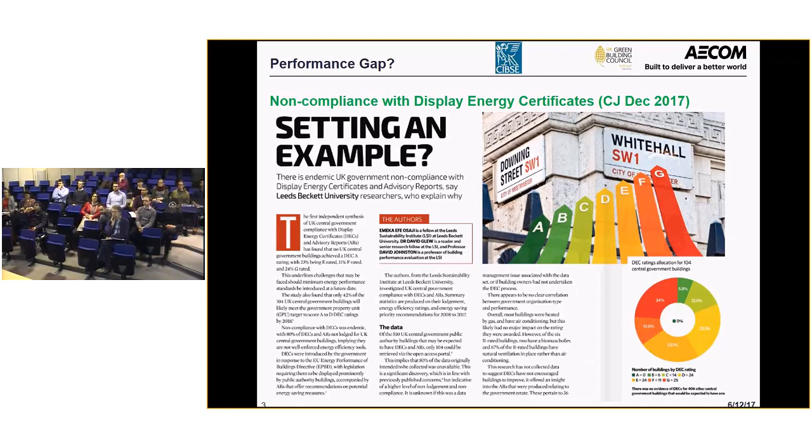And I wanted to throw in a few other ideas of things that you'll probably think are a bit controversial. But certainly performance seems to be the hot topic. If any of you've looked at this month's CIBSE Journal, all those bits are out of the CIBSE Journal to do with headline performance, or HVAC Systems Group has performance gap in its site, or stuff to do with performance awards. They've also got things talking about display energy certificates and how they're not being used, and looking at compliance within the journal. And also the CPD at the back is on something called co-heating tests. I've got a few results from co-heating tests of people saying, well, we've done a different type of test on a building, and it might get closer to performing, but it still doesn't give you exactly the same performance. So what is going wrong with what we're doing? A lot of the grounds for the performance gap were people comparing often a display energy certificate, a DEC, with an energy performance certificate.

One building said it would perform like X, but it didn't really mean it would perform like that. They'd measure it and say, boy, we've got something that uses twice as much as they said it would. Well, did they say it would, or is that just problems in software, problems with the users, or problems with our knowledge of physics? Where are the shortfalls, and how do those things add up to buildings using 3 or 4 times the energy they thought they would? And is there anything wrong in that?

You'll probably all have your own opinions, but I know from my own mistakes, just a simple budgeting I did as a dad of 3 kids who are now married with 3 grandkids. I budgeted for my wife giving up work to look after our first child, and thought I could cover the gas bill, electric bill, phone bill, all sorted. What I didn't budget for is that when someone's at home all the time with a new baby and the house is a bit warmer, your gas bill can quadruple - same house, and the electric bill goes up.

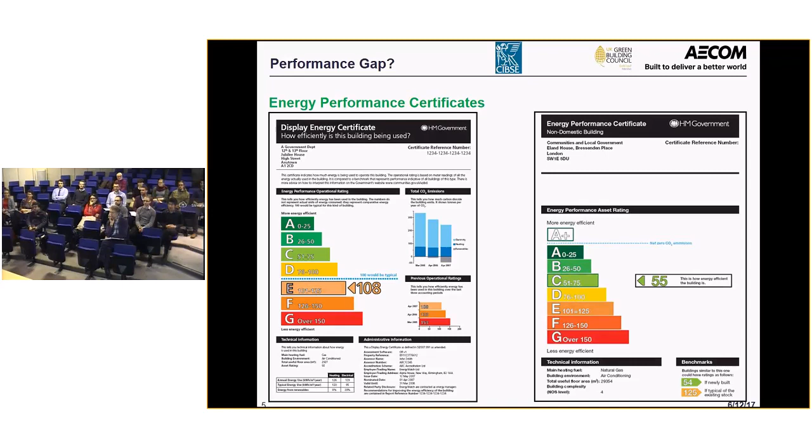So I want to look at something that came out of that, and this is probably even worse - I think I should have done something better with it. The question was, which is more efficient, the B-rated building at 46 or the E-rated building at 109? And as you might expect, the E-rated building was actually better than the B-rated building in terms of energy performance.

It was reported also in the Royal Academy Engineers thing. It was done by the Better Buildings Partnership, and they looked at A, B, C, D, E, F, G - those are the categories you get on your energy performance certificate. And this is the actual energy use, which is in an energy unit.

It's in kilowatt hours per square metre. So it's not a good sample size to say that E's are better than an A, but actually the average of E is better than the A-rated building. Quite a few of the E-rated buildings were pretty good, and the D-rated buildings were good. But you'd think there ought to be some correlation between kilowatt hours per square metre and what the energy performance rating was.

So you're all clever people - what do you think is the major reason for that difference? CO2. It is CO2, because it's a measure of CO2 and ratios of CO2.

So you can get a really good A rating because you can get low CO2. And how do you do it? You put in a biomass CHP scheme, which uses a lot more energy than actually having a gas boiler in there in terms of carbon, but it's seen as good because it hasn't got the CO2 associated with it. So it's a CO2 ratio, which is not an energy unit.

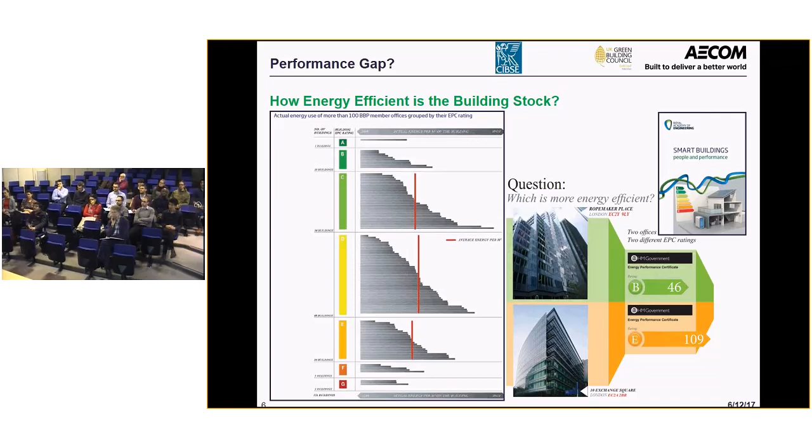So what also happens is if you look at calculating using the two mechanisms of an asset rating or an operation rating, you could say that for the same building in each type of mechanism - hotels, deep plan, shallow plan - that the asset rating is usually lower than the operational rating, except when you come to supermarkets. So why are supermarkets different? Or why are there big differences in different types of buildings?

Now, the problem with this work is the government only has a certain amount of money. And when they want to change the regulations, they can't look at 50,000 different types of buildings. They've got to say, we'll look at a few sample types of buildings. And our regs are based upon, you might say, flimsy evidence.

I shouldn't really say that, because we've done most of the work behind that flimsy evidence. But when you do it, you realise, well, hold on, by changing this little thing, it can make a big difference. But we're not looking at those scenarios, and where are we actually modelling it?

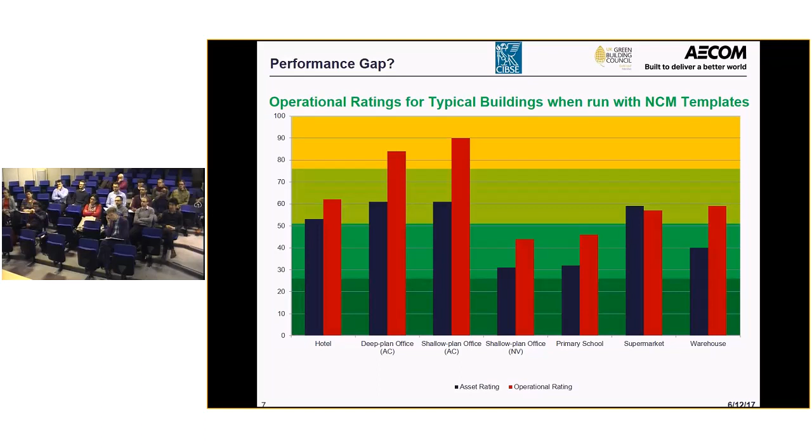Is the building going to be down on the top of Dartmoor, or is it going to be over in East Anglia? Or where is it in the UK? Where do we model it for? Because we're not going to model it for every location that we've got. Now, I want you to contrast that with some real data.

Now, we always say it's real, but take this as sort of real - it may not be. But if you've done a building with identical units, this was presented by the current president of ASHRAE, a professor I think in Denmark. I asked him for the slide because I've seen it cited many times - it's such a graphic illustration, a fairly well researched and rigorous analysis.

They looked at it over 4 years - red, blue, green, and crosses. They took 290 identical units and asked how much energy they use per square metre. So heating use in kilowatt hours per square metre is on one axis, and up the side is the number out of those 290 that fall into each category - how many use 100, how many use 75, 60, and so on.

You've got trends in green, and the same sort of trends in crosses and in blue. Most are around the 100 mark, but some are up to 200, and some as low as 20. So when we give a certificate, we really ought to say you can expect it to be 100, but it could be as high as 200 or as little as 20. You think, well, that's pretty wide, isn't it? So what has made that difference?

That difference is primarily people - something you haven't got any control over, and I haven't got any control over. That's the prime reason, because the buildings themselves can be tested and commissioned. That was a pretty good sample.

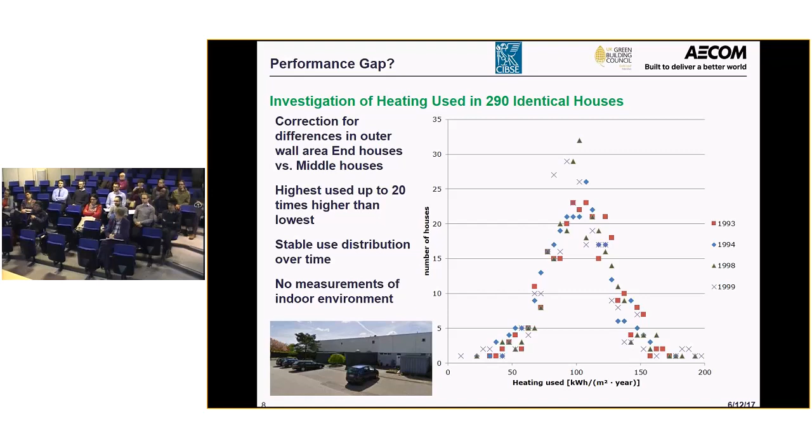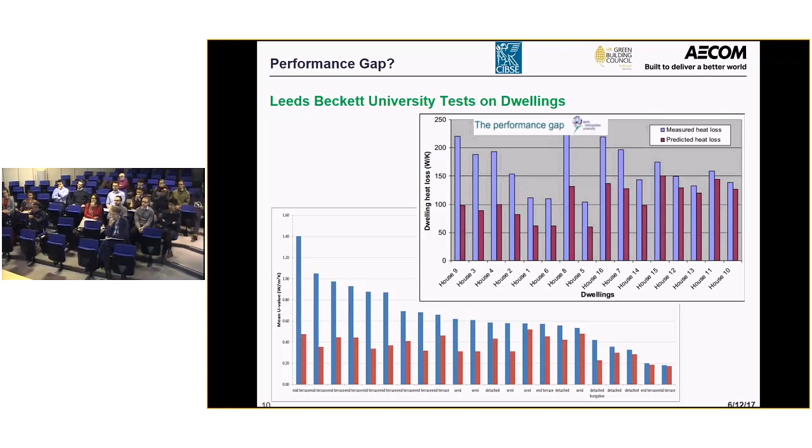The thing that does come out of it is these ones up here that are closer, in reality, are passive house design things. They've had a lot more care taken over actually putting the things together. But they still give you differences.

The sort of difference you'll get, these are all passive house ones, courtesy of Leeds Beckett. I've got a friend who lives in this group of houses, and he could tell you that the houses there, there's a difference between what one uses and another uses. They all use different amounts. But they're not going to give you the same.

So where are the differences coming from? Well, it could be the modeler was no good. It could be the software is no good. It could be the weather data we're using is useless and we're not ever modelling it against real data. If we're trying to predict what's going to happen, we haven't got the weather data for that date at hand.

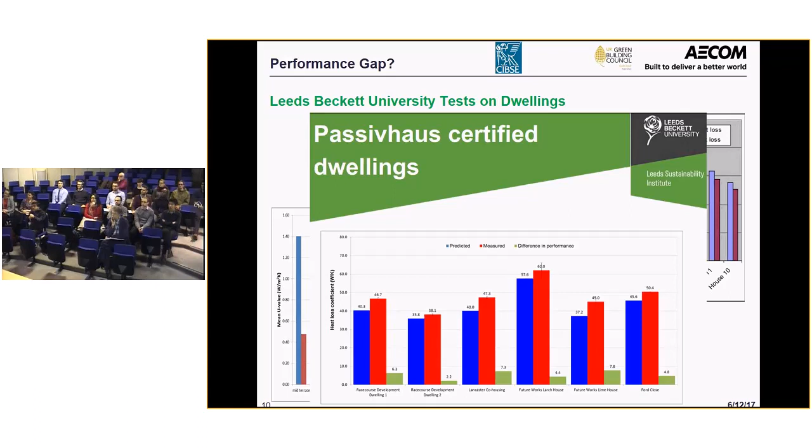Now, this was something that caused a big stir. It came out of work at Exeter University, but the guy is now at University of Bath. It got picked up by the Telegraph, and I think it might have got picked up by the Guardian. He essentially said modelers are incompetent, paraphrasing it, because they don't know what they're doing. You could get better answers by picking someone off the street, and they'll give you a better sense than you're getting out of these experienced modelers.

And the thing that got my goat a bit is I've been doing this sort of modelling, actively for 38 years. And essentially, the older you get, and I'm in the older category, the least likely you were to get it right. That's exactly what it said. The research found that building modelling professionals could not agree on which aspects were important and which were not important, and all the rest of it.

Now, to me, the research that went behind that is not that good. That's my opinion, because they've done a model in a bit of software and they've assumed that the results from the model represent exactly what happens in practice. Well, that's a fundamental flaw to do that in the first place, because the models aren't that good.

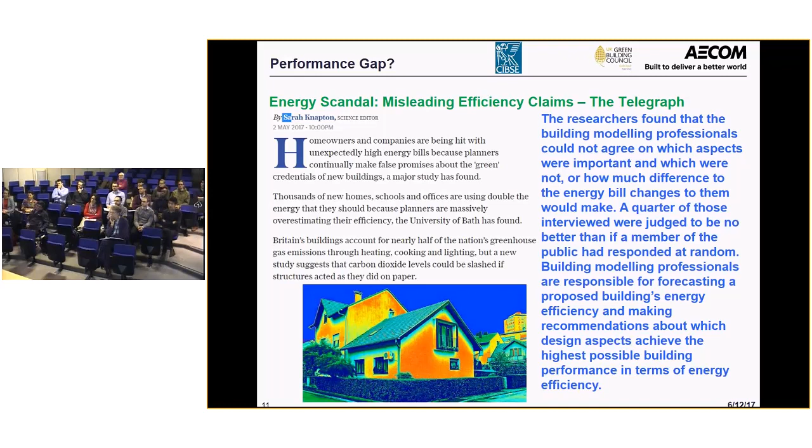Are the people any good? Well, they're following rules that they've got to follow because they're doing it often for compliance, and they're not doing it to predict an energy load.

And then we had some nice feedback to them saying we take great issue with the blanket criticism of modellers in the study, and explaining why they thought it was not necessarily that good bit of research that had made the headline. But it's certainly focused attention on, actually, perhaps it's not just the way it's built and the contractors and a soft landings approach or certain things we want to do. What about the models and the modellers?

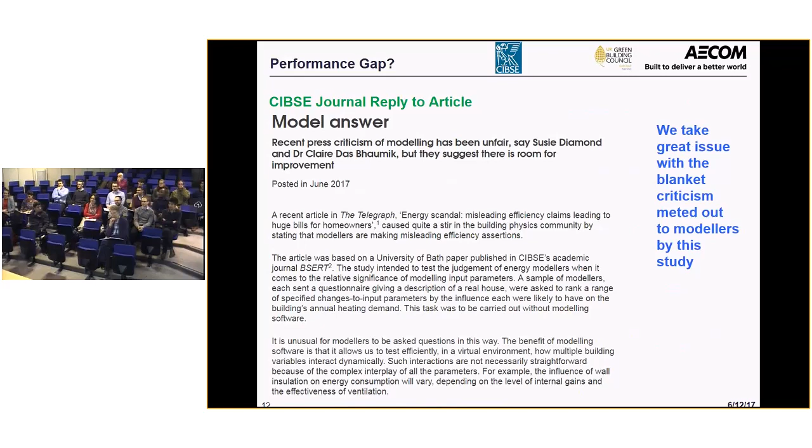Now, how many people in the room are modellers? Not a few. Now, it hurts a bit when you're told you're incompetent, doesn't it? You know, that you're just not up to the task. And perhaps I ought to hang up my boots because I'm on the older end and I'm more likely to get it wrong than you are.

But it comes down to really what is performance. What do we mean by performance in a building?

Now, I thought I'd go in and look at cars, because a lot of people can understand cars, and I got accused yesterday when I put this together by someone in our group, who came up to me and said, well, are you looking for a new car then, Ant? I said, hardly. Well, why have you got all those up? I said, well, I was thinking about something to illustrate what I mean.

So I just Googled best performance cars. That was what I put in, because I'm talking about performance and performance gap. They came up as the top 10 best performing cars. But what's that based on? None of them are fuel efficient. That's what I really wanted, how good they are in terms of giving me economy. Their metric was a combination of speed and acceleration. I wasn't interested in speed of a car and acceleration of a car.

You want to be worried about your MPG, don't you, or your CO2 emissions. But anyway, that's what you get if you start looking at performance.

So I then looked at electric cars, because I'm on my third Prius, and I like a Prius, and it's pretty economical, I think. It doesn't do 0 to 60 in any sensational time. But then these are the top two out of a survey for best electric car, and I thought it's interesting what they said about it.

So here is the Model S P100D. The 100 means it's got a 100 kilowatt hour capacity battery in it. And it says this high performance model can do 0 to 60 in as little as 2.5 seconds. Now, I also found a report that tested it against Ferraris and Porsches and other things, and it beat all of them, and they got the time down to 2.2 seconds for a real car on a drag track. So that's not over-egging it, saying it can do 0 to 60 in 2.5 seconds.

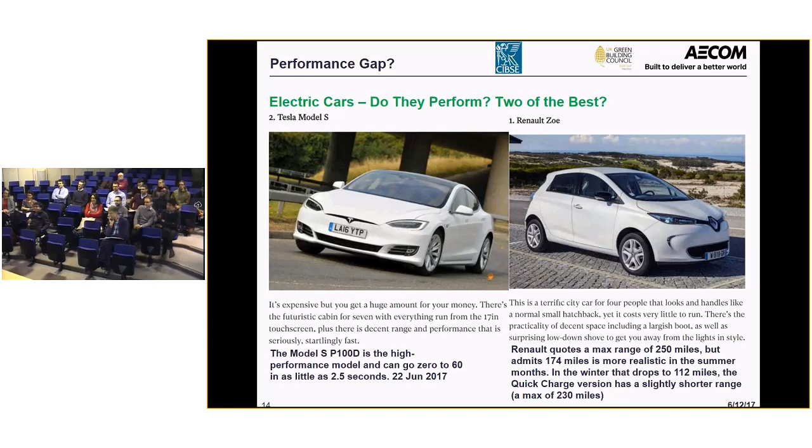So you can think of, you look at it on a standard test. Does anyone know exactly what the tests are for testing a car?

I'll tell you who does know: VW. Now, don't you think they were really smart? Weren't they great at getting a Bosch unit? It could predict what was happening and adapt its running conditions to knowing it was a test. Now, I think that is blooming brilliant.

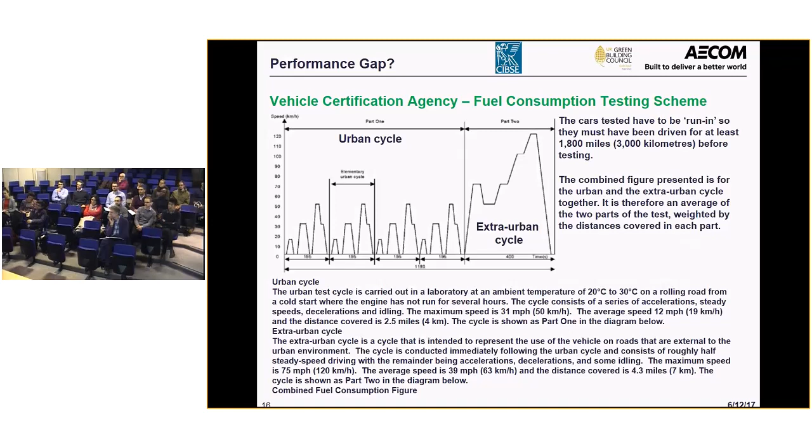I think we should. So we've got to get cleverer and not just say they're crooks.

Well, you don't know how anyone's going to drive a car or be in it, where they're going to have everyone in every seat, they're going to have stuff in the boot. Some people complain when they tow their caravan and they get less than half what it says. What would you expect towing a caravan?

I lose about 3 mpg if I put my windscreen wipers on. If it's raining, I'll lose mpg easily, because it's fairly aerodynamic. But the minute you have these windscreen wipers going up and down, you lose the aerodynamics. They're no good in rain. But we don't understand all these things, but they all make up a mix of what happens.

So when you do your building modelling, all you thermal modellers, how do you take account of the rain when it rains on your glass? What happens in a car when it starts to rain? Do you ever see it steaming up? Do you see the glass getting really cold because you've got water on it? Do you see a change in the dynamics of that thing? And how quickly can the air temperature outside change when it rains? You can lose 5 or 6 degrees on a warm day when it rains, within 15 minutes of it starting to rain. And yet we don't use rain in our thermal models. It's a big thermal indicator. Why don't we use rain? Well, we use temperature. So are we selective in what we use?

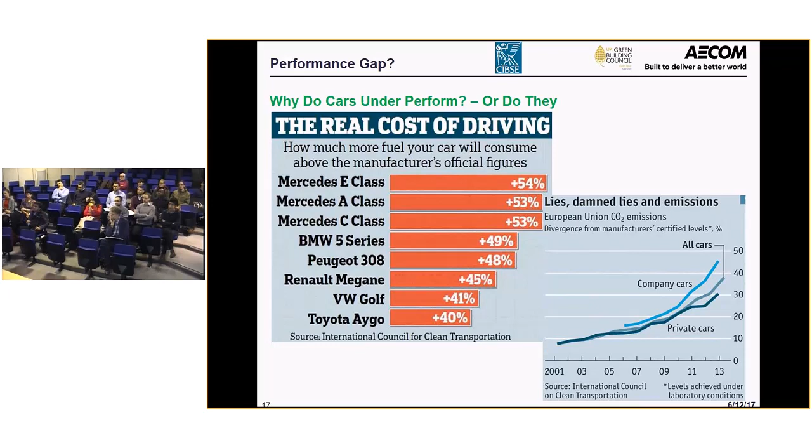Now, this is the latest report I've seen on cars. Do they over or underperform? Real life test, 2 days, taking all these cars and driving them from Oxford out to Lincolnshire, over to Worcestershire, a mix of motorways, hilly, city centres, stop-start. Real conditions on real roads over 2 days of testing. The winner is the Ford Fiesta TDCI, and it got 122 mpg.

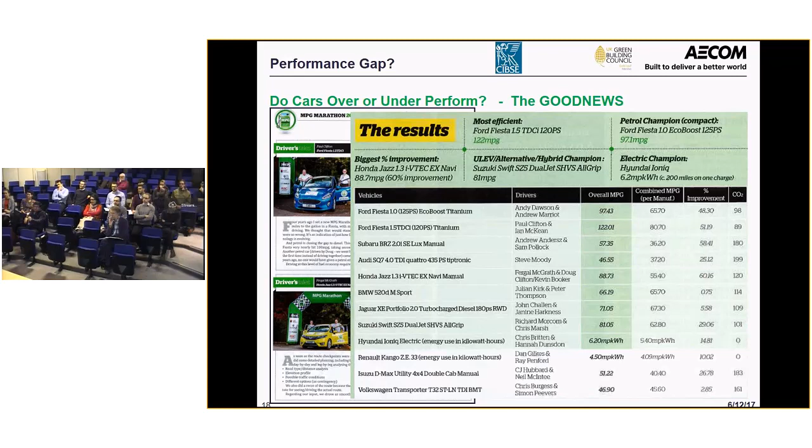So do cars underperform, or do they overperform? It shows you the spread. They reckon that on average a typical car is 24.1% lower than the average that's given. And a lot of them are 40%. And you saw those ones at 50 and 40.

But you can get certain people driving them on these challenges with real road testing, and they can overperform by 60%. So do they overperform by 60 or underperform by 40? That's quite a gap, isn't it? So you reckon you can predict how someone will drive a car?

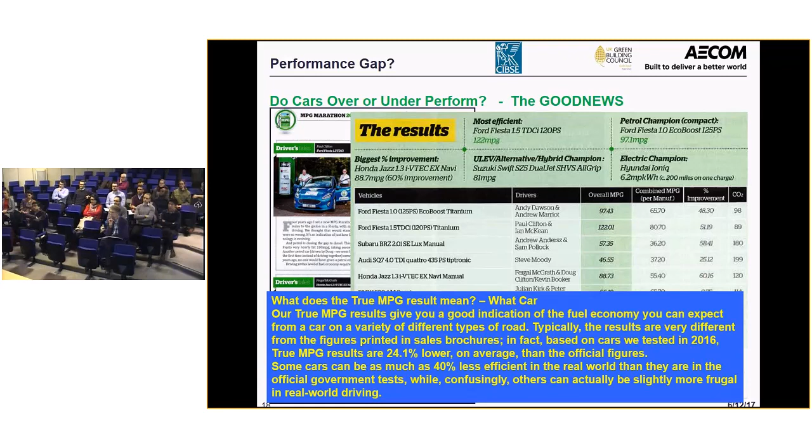Well, we can. Can we predict how someone's going to use a building? That's assuming they're right in the first place and set up correctly. Now, I used to say probably 10, 15 years ago, when this stuff came out to go on a fridge and a freezer, it will tell me I'm going to use a certain rating on a fridge, right? 150 kilowatt hours per year.

And I'd be pretty confident if I've got an audience less than 50, which is here, that I could say to people, I'd give £100 to anyone who actually uses what it says on the label, because I don't believe any of you will do. I'll still be pretty confident in telling you that it might say you're going to use 150, but if we did a straw poll and I gave you all exactly the same fridge and came back a year later and said, how much did you use? Was it 150? Some of you are going to use 400 or 500, and some of you might use 50.

I'm confident of that. I'm confident in offices, which use often the same fridge, that if my granny had one, she might open it 2 times in the morning and perhaps 3 times in the afternoon, and there wouldn't be an awful lot in it. She wouldn't be putting hot stuff in it. She wouldn't be doing things, and she'd have a pretty low number.

If it's in our office, I bet those doors are open 30, 40 times an hour, and there's milk going in and out of it, and it's probably the door's open as much as it's shut, and you're trying to maintain it at 5 degrees, you're going to be using 600, 700 kilowatt hours. Does that make sense to you? Yet we put a label on it because it's actually a standard test condition, which means you can at least compare them. But you can't predict what it's going to use until you know who's using it.

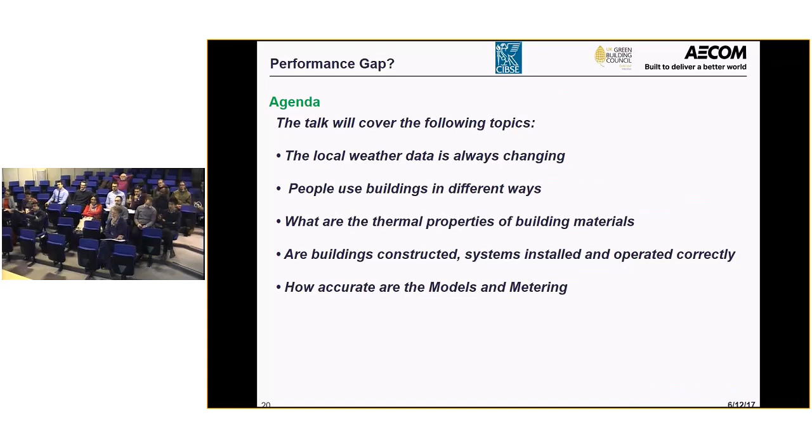Right, so that's preamble. Probably spent too long doing that. So I'm going to get through to the points now that I wanted to cover. So we're all right till 9, wasn't it? 9? No, I'll try and speed up. I want to cover weather data and people and thermal properties of materials, and say, well, we think we know what's happening, but do we know how to operate buildings, and how accurate are models and metering? Because I think models need a lot of improvement. So what should we be doing?

Well, let's look at climate. This is not local. I said about local, but just look at the rate of change on this chart. I don't know if you've ever seen it. I think it's a funky diagram, this. It's looking at Arctic ice between 1979 and 2017. Now, again, 20 years ago, I used to use Arctic ice as an indication of how fast the climate is changing. And I used to say that when I was born, 1957, to when I was talking then, we've lost more than half the Arctic ice that there is. Now, if you start looking at this now, from 1979, that's the overall volume, and you're looking at different months as we go around.

Okay, so the different colours would be within that month going around. So these are the summer conditions, and these are the winter conditions, and the outside ones there are the times when it's essentially got most ice after the winter freeze, and then probably the black one is September, when you've got the least ice. Now, if you're looking at it, you've gone up there from 17.5 down to about 5, and from other points. Anyway, we're seeing a massive change in Arctic ice volume. And what that means is there's less area, there's less ability to reflect the sun back out again. It's heating up the oceans, which accelerates, and it spirals into that sort of spiral.

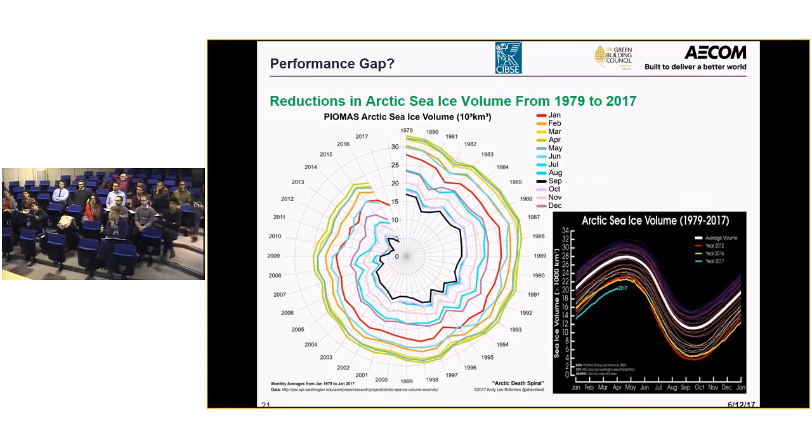Now, that's looking at where we were in 2017 now, back to where we were is the average of the period, and then the earlier years up top. So you're seeing that changing from the least ice down in September to most ice there in the March, April. But that is changing very rapidly. That's not that big a period of time.

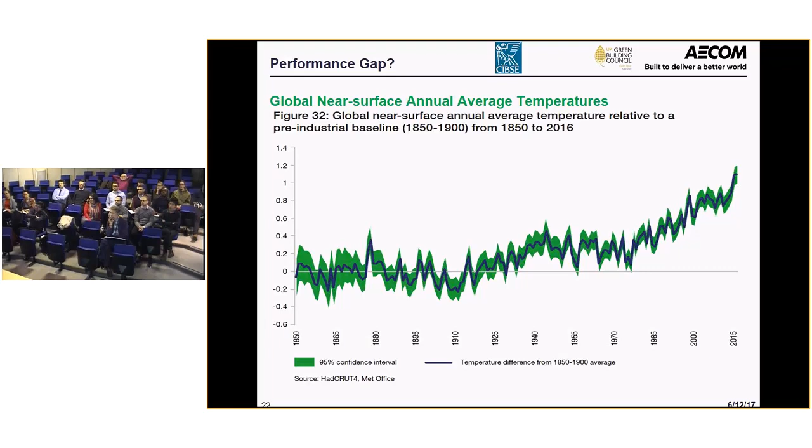What about global near-surface annual average temperatures? They're going up and up. Now we've had times when they've bottomed around a bit, but in essence, they'll still move around, but we're still getting gradually warmer and warmer. If you want to put a curve fit through it in that period, you can say they're going up at a rate based upon the slope of that line you put through it.

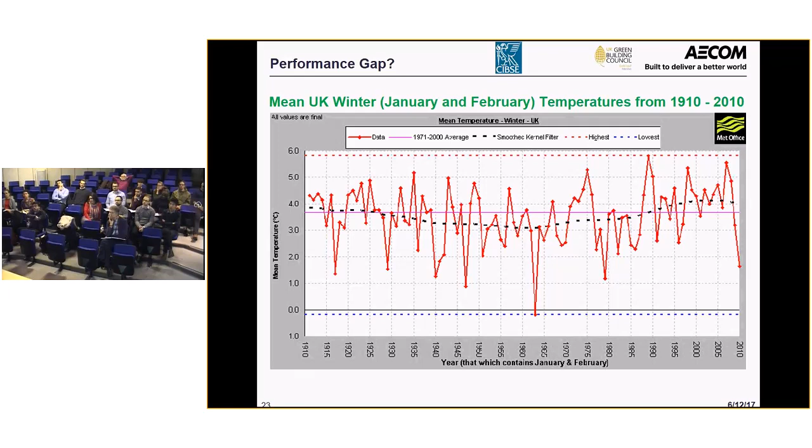Now, we do know also that it messes around, and 2010 was particularly cold, and certain summers were particularly warm, but we've got quite a change in the temperatures of how you deal with it. So I talked about 2010 being cold. Well, 2010 was particularly cold. It was about 5 degrees lower than normal, wherever you were in the UK, for the whole of the month. We have places in the UK that actually never went above freezing for the whole of the month.

Now, that's quite unusual. I had a complaint from a building operator that I told essentially what we thought the energy consumption was going to be, and he phoned me up and said, this is ridiculous, we've just got our energy bill in, and it's 3 times what we were expecting. I said, well, what were you expecting? I was expecting what you said it might be, which was a number, and it was 3 times higher. And I said, I'm not surprised. And he looked at me and said, don't say that. I said, I'm not. How come you're not surprised?

I said, well, it was below freezing all the time. Did you want your building to freeze and have all the pipes burst, giving you a massive bill from the flooding? Or do you want the thermostat to kick in as a frostat, even though there's no one in it over Christmas, to stop the pipes freezing? Why does it do that? I said, well, it's pretty good design, I think, to stop it flooding and freezing. And I said, if you start heating it when it's that cold outside, and you've got it heating all the time to stop pipes freezing, it's going to use a lot of energy.

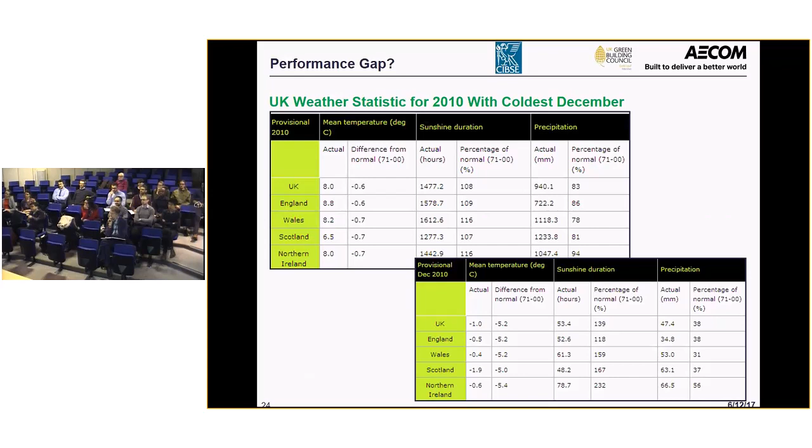You didn't tell me that. No, I didn't tell him that. So am I at fault for not explaining that temperatures can get pretty cold? It's probably better to have a frost set point to say we don't want the pipes freezing. But it makes a difference.

So we're looking at changes, and because we lived through them, I don't think we're as aware of how quickly stuff is changing. To think of it as a degree or two, you can look at the surface temperature, it's gone up by 1 degree over a long period of time. But the rate of change of our climate in the UK, to me, is phenomenal.

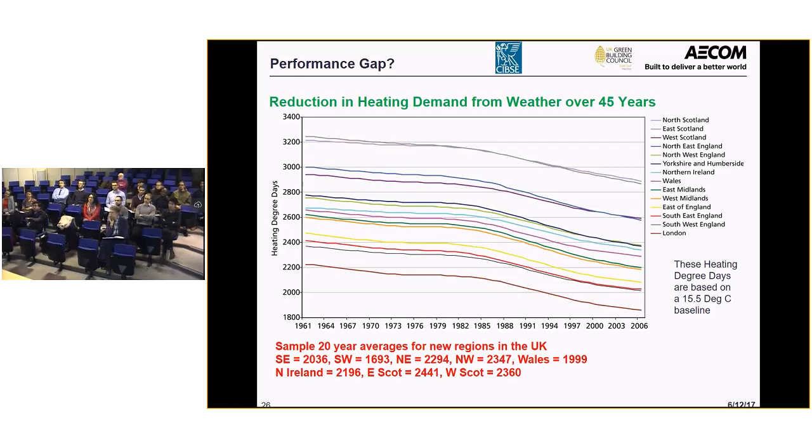That is not just a figure, a rogue day, or a month. That is aggregating across every month, looking at the temperatures outside and saying, how do you compare? That means, clearly, we should be using a lot less heating in our buildings, because the outside climate is now much, much warmer.

The one that's even more worrying is cooling degree days - at what temperature do we need things cooled? We never used to need cooling anywhere, really. But it's now up to about 30% when you take it up to 2017. It's got warmer over that period - from 1961 up to 2006 you can see 27, 28, 30% drop in heating demand. When it's gone from 20 up to over 40 by 2006, and now it's almost up at 100, you're talking about not just a percentage, you're talking about 500% or 350% more demand for cooling, just based upon outside temperature.

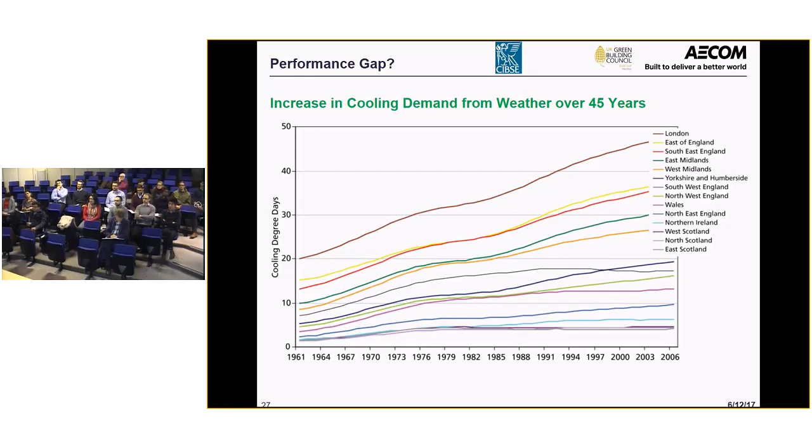And that's not taking the scenarios that say the mean temperatures in winter are going to go up by this amount. Whether you believe these numbers or not, there's not one of them that's coming down in temperature, going through the scenarios. So it's going to get warmer. And yet we're designing buildings still, with most people saying, it's in the brief, we've got to design it to 28-20, or we're designing it at 31-20, or we design it on some arbitrary number.

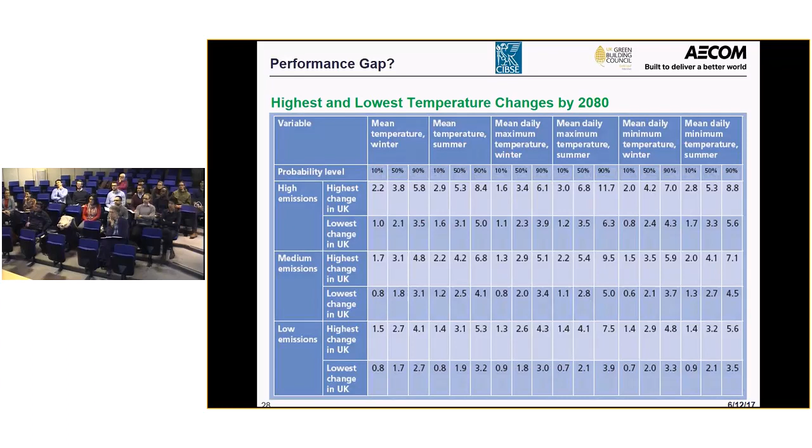CIBSE are not a lot of help, actually, and I'm a fan of CIBSE. They've given up telling you what to design to. They just say, look at the probability curves, and you make a pick out of a number, anything between 25 and 35 - it's in that region. It just says, we're not telling you what to use. And we want to be told, but they can't, because they don't really know where it's going. All they know is it's going to get a bit warmer. That's based upon the modelling they've done, but it's also based upon looking at what's happened over the last 50 years - it's definitely got a lot warmer.

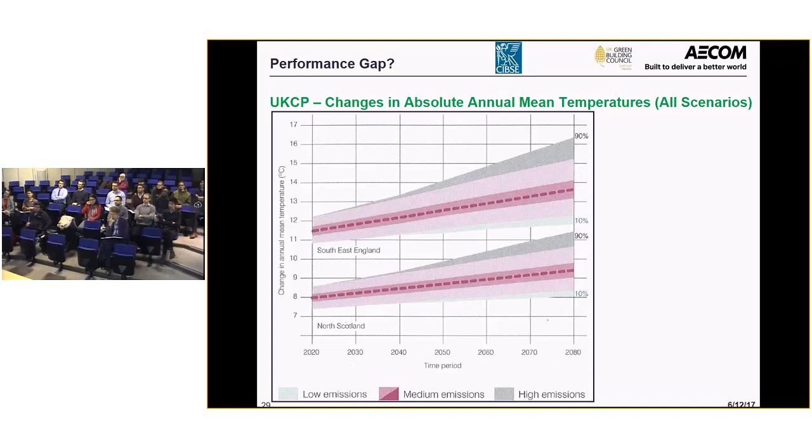And then what happens when we get in a town centre? The weather tapes, up to recently, because they've now got different ones for different parts of London - we're never based there, they're always based back here. Then you have some London weather centres, and if you start looking at London weather centres, it's been at three different locations over the last 40 years. So there's no consistency between the data.

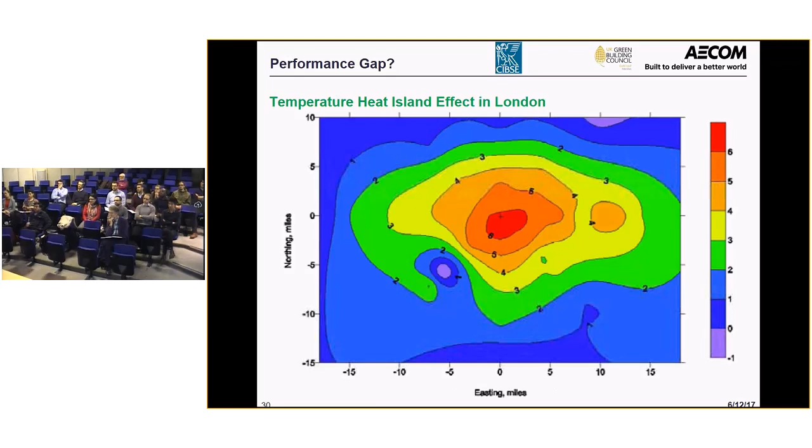We've got weather data, but is it of any use to us? Most of the weather data we used has got some of it made up, and other ones will take data that is from totally different places and mix it into one weather tape. I didn't know that, but that's what they do. When you start looking at radiation, when you're in the Manchester weather tape, they always use the temperatures from airports for some reason. And if you want the radiation, you go actually to what used to be the Ministry of Agriculture, Fisheries and Food site. So you'd say, well, I'm using Ringway, but I'm actually taking the solar from somewhere 60 miles away, because that's the closest place I can get to it. And you've got no match between what is happening with solar gain on a space and the actual temperatures there, or what's happening with rain and the temperatures in the place, or what's happening with wind speed and the place.

But what we are seeing is changes again, and we're seeing things getting warmer. And if you look at things which predict what you're using in PV - if any of you did stuff with PV, or if anyone uses SAP for doing a test for a house. So you're building your house down in Cornwall, say down at Truro or St Austell. What weather tape do you use when you're using SAP for Cornwall? There is one - Plymouth. Do you use Plymouth?

No, you don't, not for SAP. What do you use?

The East Pennines. It doesn't matter where you are in the UK, you have to get standardisation for somewhere here. It's going to be a lot warmer down there and a lot colder up there, but you give a certificate for a building that isn't related to your site at all. When you do the sums for PV grants, it's based around 1,000, not that it can be over 1,200 there or 900 up here - you just do it for a site. Now with overheating within SAP, you can use location data for looking at overheating, but for the SAP standard calc, use East Pennines, which has quite a variation.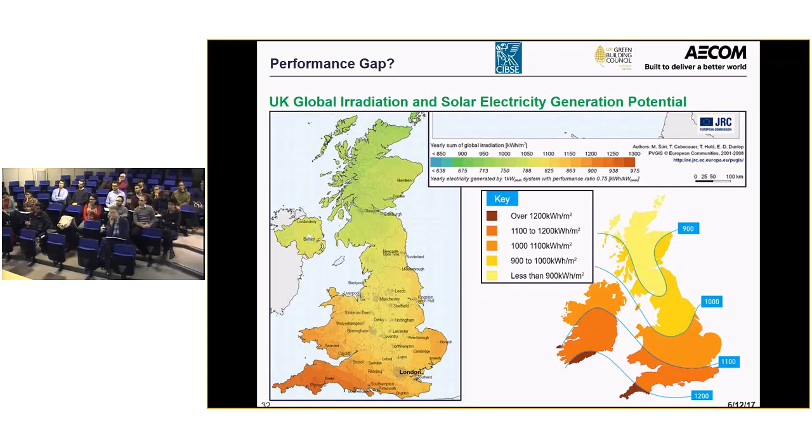You all know that - I did this work a number of years ago, 1989 probably, taking all the results from loads of schools and looking at how much energy is used, comparing it in terms of zones. So if it's a cold area, it's going to use more than a warmer area.

You take all this data, and before you say what are the top 10 and bottom 10, you'd get rid of all the outlying low ones and all the outlying high ones, assuming the recording equipment is fine. So when you've got something between 70 and down to 25, there were definitely some that might have been up here with stupid numbers. So you get rid of them, and you get rid of the ridiculously low ones too.

Hopefully things are functioning - that's not saying every bit of data you measure is right, because measured data can be really wrong, and that's known. A heat meter is notoriously wrong at giving correct numbers, mainly because people install them wrongly - not that the function is faulty. It says you should have them this way up, but because it's against the ceiling there's no room, so they do it upside down. It doesn't measure right when it's upside down, or it's too close to a bend, or it's in all the wrong places. So we can get things wrong, but that's often what people want to know anyway.

How much is it going to cost me per pupil to heat a classroom? The average cost might be £33 or £37. That's quite a useful number for them, but they also need to be aware that while that's the average, it could be down to there or up to here, so I want to factor something in.

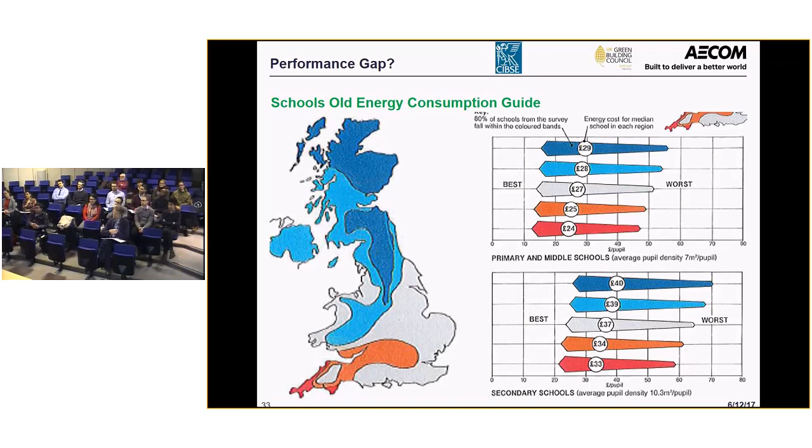Depends on the outside temperatures and what you're doing inside, but it can make a big difference. I'll show you some things in a minute. Sunlight, well, can we get lighting? And the other one I've put in there because we ignore it all the time, but it's quite important: if you're down here where I'm going to be tomorrow, or you're here, you've got a lot more rain and a lot more moisture in your fabrics than you might do if you're over here where I live. And moisture has a big impact on how a building performs, yet it's never included.

I don't know of any model that you're going to use, IES or TAS or SAP or SBEM. They don't use it. And it's an important quantity.

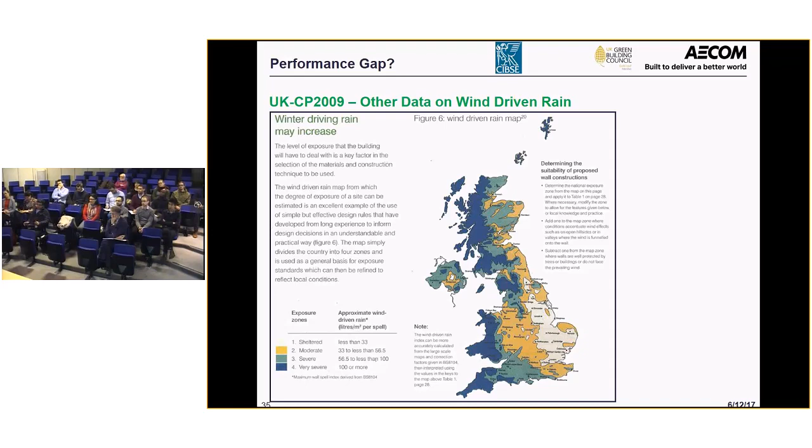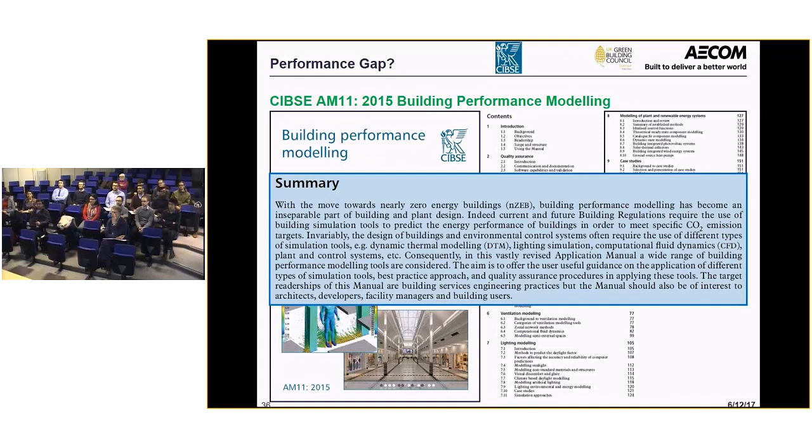At least we're getting better with our guidance. We've got the latest building performance modelling guide, which tells you how to do things, but it tells you how to do it to meet specific demands, and it tells you where you might do certain types of modelling at certain stages. It asks, are we looking at a benchmark, are we looking at degree days, pretty crude, or are we using right up to dynamic thermal modelling - and dynamic thermal modelling is not very dynamic. The only thing that's dynamic in most dynamic thermal models is the weather data.

That's changing. But do you change your crackage? Do you change your U values? Do you change your occupancy? Well, have a profile that might be right.

So I want us to look at some of the areas which are real weaknesses in the way that we model, because I think the biggest problem is we believe as modellers we're doing it right. And I'm not saying you're doing it wrong - you're following the procedures you're told to - but we're not highlighting the weaknesses in a lot of the models.

And I'm not doing this because I'm moaning at IES or EDSL or things like that. I wrote a lot of the software early on, and you get to know what is right and what is wrong. But I see loads of things where people love the answers that come out of these models and say, well, I've got a cooling load and I've got a heating load, and therefore my energy equals X. And you haven't got a clue what it is, you just know what your loads are. What system's using to deliver it, and then how are you controlling it?

And you get all these bright sparks that annoy me. They say, well, it's ridiculous, you're heating and cooling in the same zone. Is that wrong to heat and cool in the same zone? I would. I don't want to be cold. I don't want to be sitting by a bit of glass, it's too cold. I want to be pretty comfortable. Now, you could say the fabrics are pretty poor and we've got a way of doing it, but we have all sorts of assumptions that go into models.

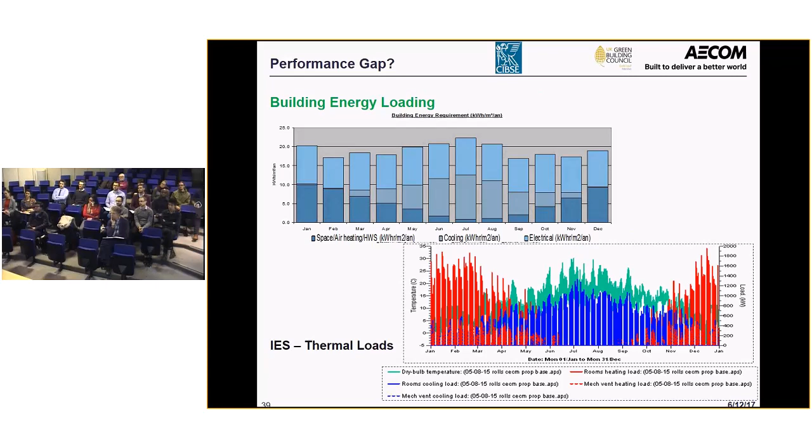So I'm going to go through some of it. It tells you what you need to take account of to look at it. So we've got to look at the characteristics of the building, we've got to look at all these things that are listed on here. But it doesn't tell you any amount of detail that we need to go into.

So if I gave you all three models, an SBEM, an IES model, and a TAS model, they will all definitely give you a different answer. Some of them could make your building pass, and some will make it fail. That's definite, because they do it totally different ways. How can you expect something that uses totally different methodologies to give you the same answer? They can't. That's why they're different.

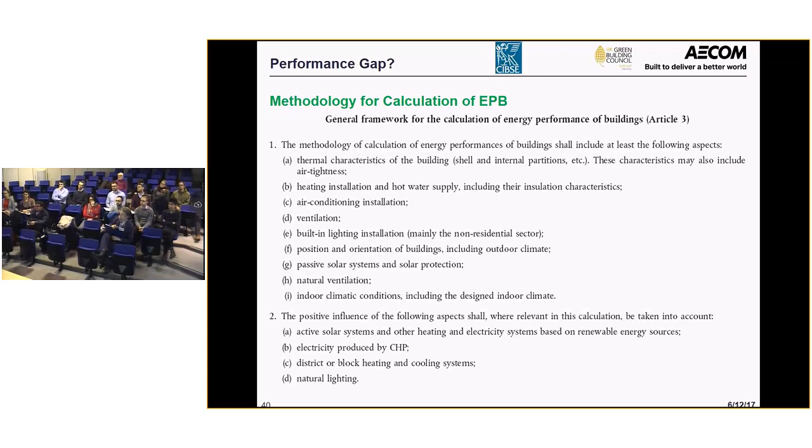One's using an ASHRAE essentially response method, which is TAS. One's using a more detailed method - probably the most detailed method is ESP-R, but it's too complicated for most people to use. And then you're using SBEM, which is meant for people to get consistency of results, not give you the right answer. You want it to be simple. So what do we use? We've still got to include those, but it doesn't tell you how to actually include them.

We've got things that say we've got to look at being lean and clean and green, and then offsetting the rest. That's the latest stuff out of the London plan from this month. And the thing that's gone down the list is they're almost blacklisting CHP and district heating by the looks of it, because they don't think that's such a good idea anymore.

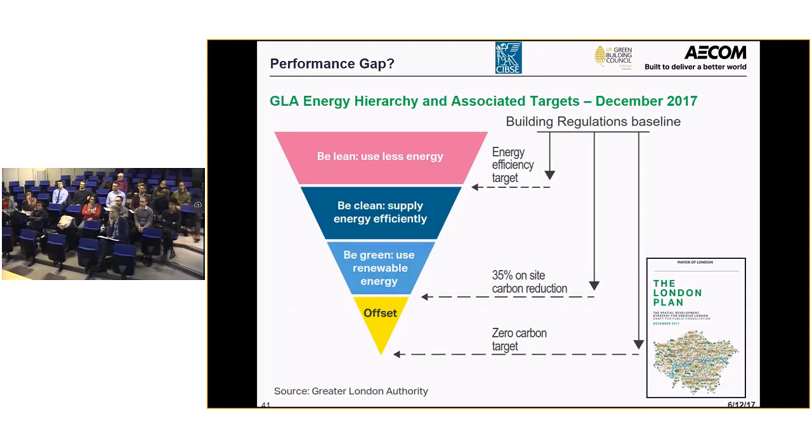Now, I came across this because I was clearing out one of the cupboards at work. And this is the guy I worked with when I started at Oscar Faber in 1979. He was a really bright guy. At the time, I joined them because there were only three consultancies doing computer-aided design in any real depth: Arup, where we are today, Atkins, and Oscar Faber. By far the best, I'm biased, was Oscar Faber. That's why I went there.

And they had some of the best modelling tools available. This was written, published in '74, but it was written after Peter had been down talking in Sydney. And I want you to think about this: the use of the CRT visual display unit in interactive design, with emphasis upon full coordination with the building structure, is probably the practice which shows most promise for the future.

Now, I joined them in '79, and we had a model that had structures and services, costs and specs, all in the model. You wouldn't have written a spec in Oscar Faber in '81, '82, '83, '84. You hit a button and it comes out of the computer. No one wrote a spec.

That stuff that we had in our computer became NES. If anyone used NES, that was the basis of NES.

Before the company Facet, that some of you might remember, which stood for Faber Computing Engineering Technology, we had a bit of software called Facet, and that was Faber's cost estimating tool. It was embedded, so it knew the number of bends and T's and pipes and ducts in the model. It was 3D clash detected back in the 70s, and it worked with the structures. I'm not lying, that existed.

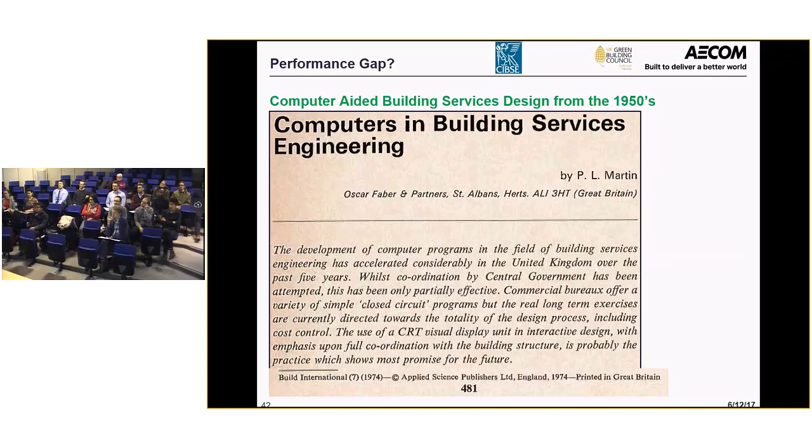Peter was actually chair. Now, it was set up in the 50s. In the mid-50s, they started using computers for building services design. It's not new, in the 50s. In '69, they set up a specialist building services group, and that was chaired by Peter Martin, in essence.

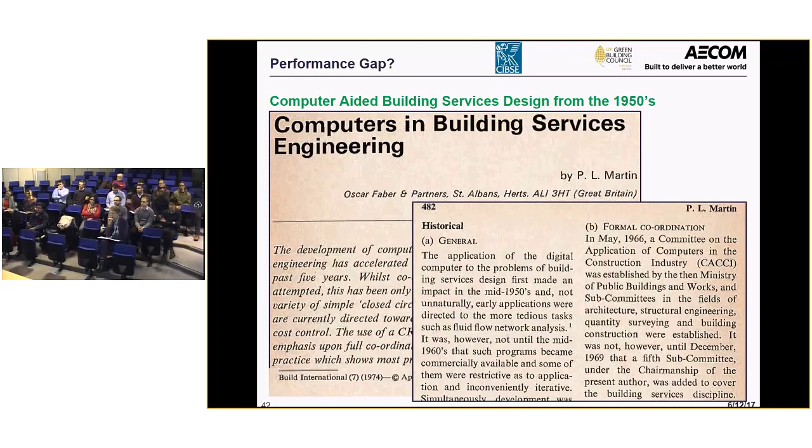So when I joined, we were working with the CICA, the Construction Industry Computer Association. They did models of daylighting and comparisons of daylight models from the 60s and 70s to see which were the best.

Now, I put this one up because it's something that I'm very familiar with, that probably no one here will be. But this came out 10 years ago, looking back to the setup of the 30th anniversary of a bit of work that said, we've got to be careful with all these programs because they give us different answers.

So what did they do? They came to Bristol. And there was an amazing building in Bristol called the SWEB, South West Electricity Board. Well, there used to be the South West Electricity Board. If you're in the main centre, they had a building there, but their thing at Avonbank was over towards Ashton Gate area. And they said, well, we use that because it's an amazing building because they don't need any heating in it. Now, they didn't need any heating because their lighting load on the floor was 58 watts a square metre, so they heated it with electric, but then they were the electricity board.

But what they said was, we'll get these people to analyse it with different models. And these are the final reports that came out of the work. It was pretty rigorous. So there was the building. These were the sort of details that went into the models, and all the models were modelled blind. So you've got to come up and say what it's going to use for heating and cooling. And these are the different models. They don't tell you which one is which, but one of ours was in there called MPro. And they're the models.

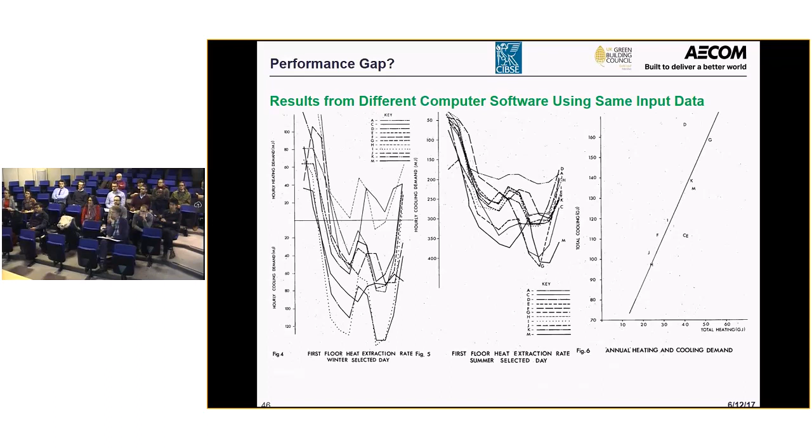Now, what came out of this was this thing. And I was asked, I used to be very involved with something called the AIC and the IBC. And this year, they had their first conference back in the UK since, I think that one was 16 or 19 years ago at Bath University. They held it in Nottingham. They said to me, will you come and do a keynote on what's happened in ventilation over the last 35 years?

So I looked at that and thought: the problem of realistic modelling of heat transport due to air movement through a building due to infiltration and convective coupling between zones - there's an issue. And I thought, what have we done to resolve any of that? We've still got a problem with infiltration and not knowing what it is, and we still don't know about convective coupling between zones, and we're not really modelling those things, we guess them.

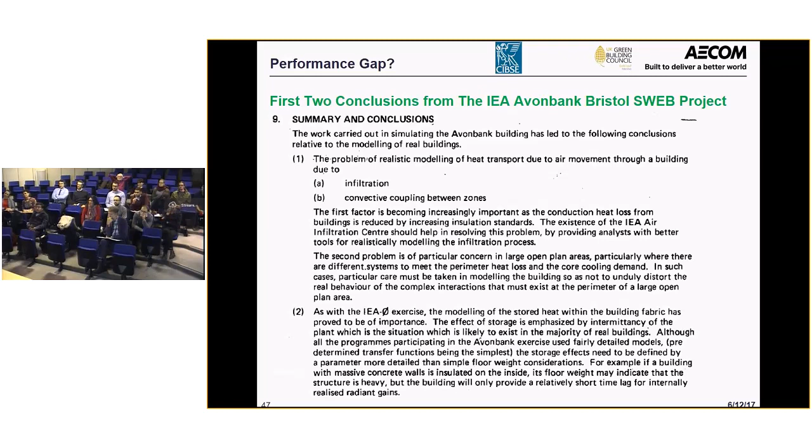So what is the right values? Would we get any different answers if we did that same sort of blind test now? So I went on to spend about 4 to 5 years doing a lot of work in air infiltration and a lot of work in lighting design and energy control of lighting.

And this was a real moment for me - I hadn't been in it long, this is '81 I think - and it came to mind because of the Grenfell Tower thing. We did some smoke movement programs and looked at fire spread in spaces, not on CFD, but using a multi-cell model. And everyone said, well, has it been validated? And we said, well, it looks like it's right, but we haven't got a fire to test it against.

We had a big fire up at Wythenshawe Hospital in Manchester. And I was sent, as quite a young lad, to go up there and get all the information on this fire and see whether we could predict what actually happened. And I did. I predicted quite well what happened. But I learned something incredible through that experience.

And I just want to say, why do we expect we can actually do it at the design stage? Now, I'll click on that slide. Okay? I knew where the fire was. I knew when it was - in December. I knew the wind direction at that time.

I knew that actually all the fire doors were propped open with fire extinguishers, which they shouldn't have been. I know that it was December and it was 7 degrees, and with a northerly wind it shouldn't have been 7, it should have been a lot colder. I knew what the fire was.

It was not a bed fire, and at that time everyone would simulate bed fires because that was the most common fire in a hospital. This was someone who kicked their cigarette through the stairwell on a 3-story stair into a sheet store, caught fire to it, and it all went up and spread for over 200 metres in the building. They had real problems, but they had good traces of where all the smoke had gone.

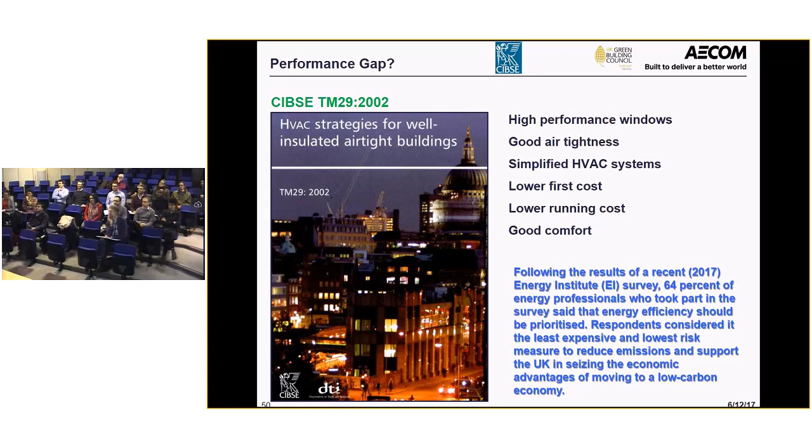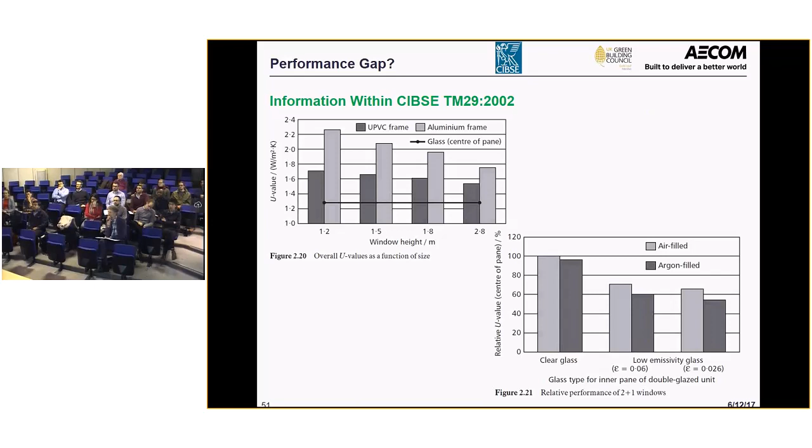Sorry, let's go on. So information within CIBSE tells you about windows. Windows are a real weak spot in every single bit of analysis you do, because most people in this room do not understand how windows perform. I'm being arrogant there, I've spent a lot of time looking at it, but you probably don't understand how windows perform. We assume most of the models that you use for validation, all the dynamic models, that the temperature is bang in the middle of it and it's fully mixed. And that's a lie, they're not fully mixed.

You assume that you're designing for people because you're trying to meet an operative temperature, and yet you're always controlling on air temperature. And that's why you often need perimeter heating and cooling in the same zone to make people comfortable. A lot of the research I did based upon that first work of 3 years research got translated into this one about the environmental toolkit for glazed facades. And I got paid to do a lot of interesting, I think, research.

Now, in the old days, in a CIBSE guide, is the window sheltered, normal, or severe? And you'd look at it, and no one knew whether their site was sheltered, normal, or severe. You might say, well, I'm on the coast, it's going to be severe, I'm on here, it's sheltered. But which way is the wind blowing? Because the wind blowing really determines what the heat transfer coefficients are on that wall. So we don't dynamically change all the surface coefficients depending on the wind speed and what's happening on the surface.

But now we do something even worse. We've got these standards up here called ISO standards. And everything we use is based upon an ISO standard way of measuring it. And I can tell you the ISO standard conditions never exist in the UK. They can't, because the solar radiation is too high. But it's an international standard.

And before you had the international standard, you'd buy a bit of glass, and on it, it would tell you the British standard U value for this bit of glass is 1.8. The German standard is 2.1. The American standard in summer is 2.5, in winter is 2.8. They'd all be different. You'd have 9 different U values on the bit of glass. Now, which one was right?

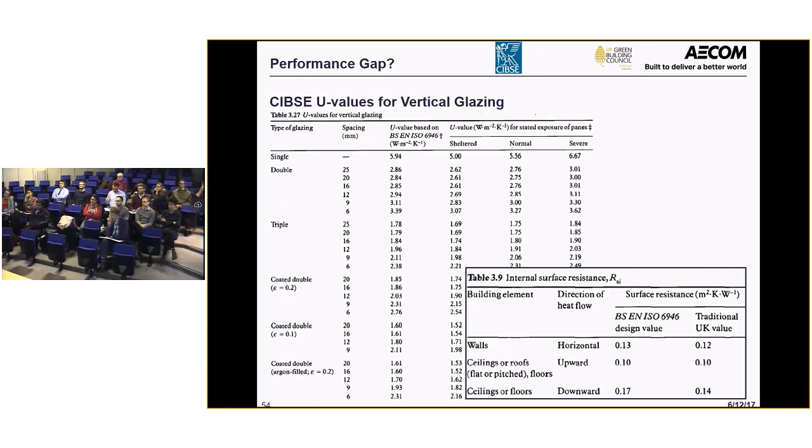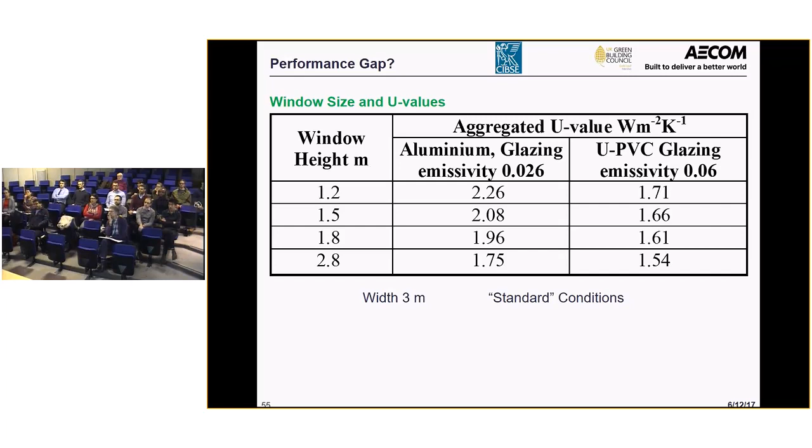Now, I wanted to do some of these things just to say that if you get glazing salesmen, they'll tell you the U values are all the same. And they're not, they're very dependent upon size, which is pretty obvious. This is a standard thing, 3 meters wide, different heights. These are the differences in the U value for a window, whether it's aluminium or UPVC, based upon the size of the window. So the bigger the window, the better it performs, usually.

Most people don't actually know what the emissivity of the coating is, they just say it's low E. I've asked people what does low E mean. I've been told it's low energy.

That's amazing, I didn't know that. I've got it wrong, I always thought it was low emissivity. So if they do get it right, I said to people, what is a low emissivity glass? How low is low? So if you're specifying low emissivity, what emissivity are you specifying when you want your glass? How low do you want it? How low can you get?

So emissivity, big difference - uncoated, hard coat, soft coat. Soft coats are usually better than hard coats. They go on different surfaces and better glass.

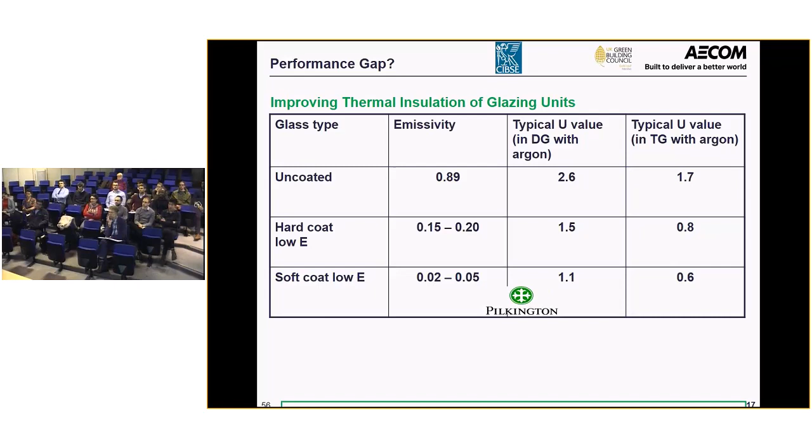This is the one I love to show people, because I still see it, and it was in a lot of software, particularly - I don't mean knocking it - but like Cymap and Hevacomp, you'd get a database of glass. If people put a window in, they'd put in glass. They don't put in windows, they put in glass, because it's an easy number to get hold of. Because every time you do a window and it's a different size, you need a different U value. How many times have you put in 50, 60 different types of glass U value because the glass is different in each place it might be in a building?

But these are the centre panes, which are easy to make. This is just one manufacturer with one range. They've got it with fixed lights and open lights, and they've said these are the window sizes - S1, S2, S3, S4. They're not that vastly different. They're not saying I'm doing a little thing up to 3 metres wide by 3 metres high. But even within that range, people are saying, it's all right, we're in range.

We've said we're going to have 1.5. But 1.5 on a lot of them is outside what you're allowed to use because it's about a window. So do we understand how windows perform?

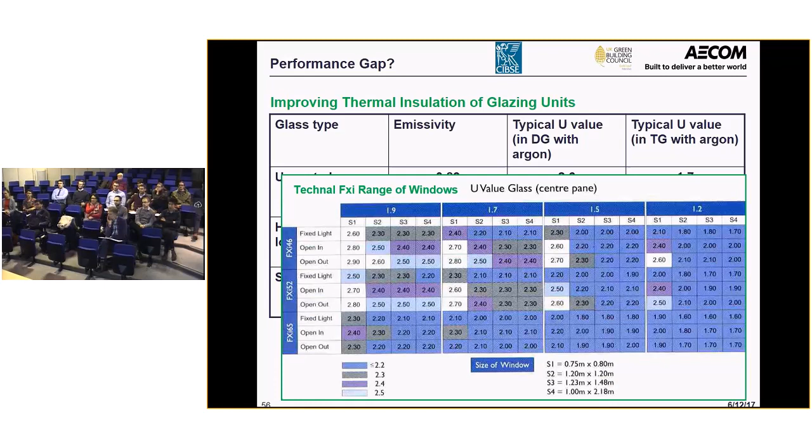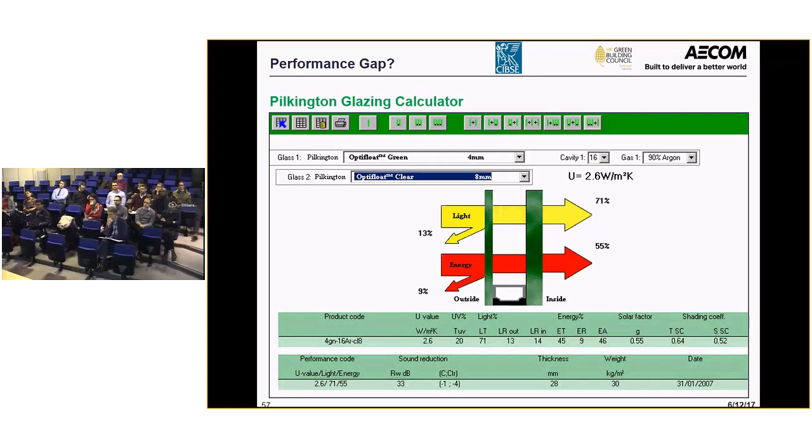So you can get bits of kit that will tell you about calculating the U values. You can look at the effect of the thickness of the cavity. Now it's pretty complex when you get into dealing with it properly, and most people don't. They just take a U value and hope it's going to work for them. They might put in the absorption, transmission, light transmission free to pane, and it will work out certain things. But then you don't really know what the software is doing with it.

And the scales that we use keep changing. British Fenestration Rating Council - that's the 2013 one, that's the 2016 one, that's the 2006 one. So we used to have A to G, then we had A star to G, then we've got A++ to E, and we're changing what's happening with these things all the time.

But is that a good indication, using an energy rating? Because I can have a U value, and it could be an A rating, it could be a C rating, or a D rating.

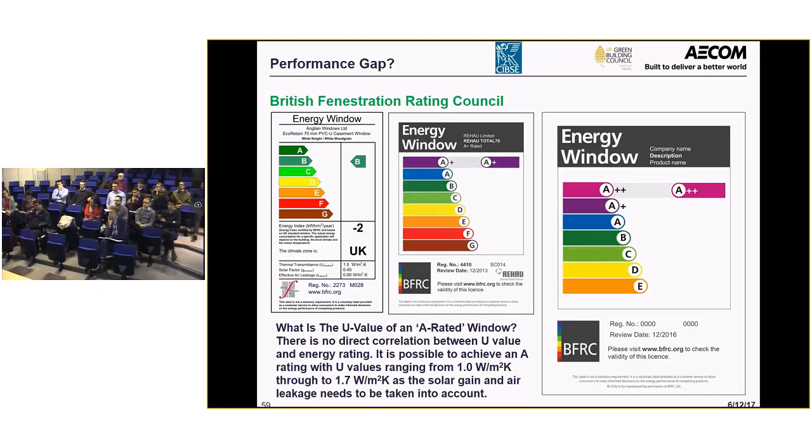Because that scale is not based upon the U value. Well, the U value is part of it, but it also takes the solar gain into account, it also takes air infiltration into account. So it's more than just a U value, it needs to know how much solar is coming in. And the annoying thing is, it tells you get loads of useful solar gain, and you get a load of useful solar gain when you don't want it in the summer, and not a lot when you want it in the winter. So overall it might say, oh, it's a net zero energy window. Yeah, but I need a shift on it of about 6 months.

Air infiltration and air permeability - I've used this before, so you may have seen it. But this is testing windows under infiltration and exfiltration. It's the same window - you're either blowing it from inside or you're blowing it from outside. Manufacturers are pretty clever because they know the test for rain and ingress, you've got to make a gasket that seals under pressure so you don't get rain coming in.

So when they do that and you test it the other way round, it actually pulls the gaskets apart and they leak like a sieve. Perhaps a 10 to 1 difference in airflow between infiltration and exfiltration. Now, good tests will do it under both, but you never know when you're doing the model whether that surface is under suction or under pressure.

Now, you might say, well, I know the wind speed and I might know the wind direction, but what about all the cases of what is under pressure? So if the wind's coming and hitting that surface, usually for every one surface that's under pressure, the others are all under negative. So the load in your building is going to say, if it's blowing a gale, I've only got a gain or a loss in that space. It's been preconditioned there because that's what you need to do to stop that room getting hot or cold. And then what's coming into here doesn't have an air load at all.

Now we've got lovely modelers who like to say, well, here's the air tightness test, we'll split it up and it goes equally in all the rooms. Well, what are you doing, putting outside air into the middle of the building? Now, you wouldn't do that, would you? No one in this room would put outside air into the middle of the building. How did it get there?

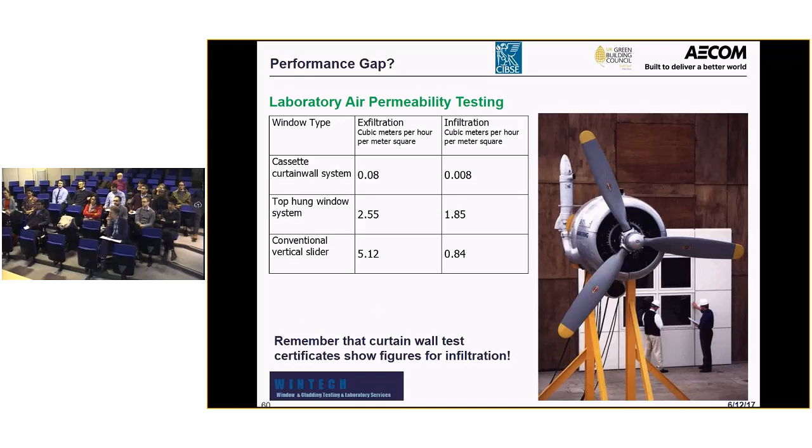But we don't understand how convective coupling works. We don't understand how stratification works in space. We don't understand certainly how people are going to use it.

Now, I just took this. This is at Queen Elizabeth building at UEA. And there's the blinds in one, there's the blinds in another. That's fully down but shut, that's fully down but slightly open. There's the blind in that one, and that's the blind. That was not done on purpose. I was just there and I thought, yeah, and I'm expecting to predict how that's going to work in practice. How many times are blinds down and they never go up again? How do we actually do it? We say, well, they're going to get them down with outside daylight availability. Do they? Might be nice to think they could.

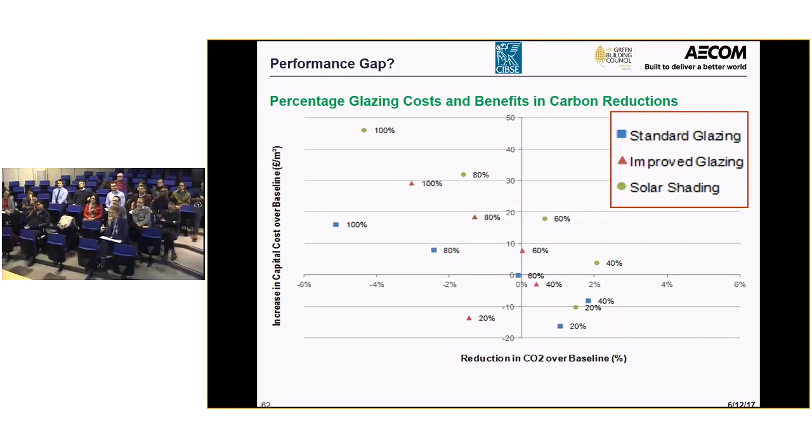How's the percentage of glazing and carbon benefits? You can do loads of charts like this. You can put in decent glass. But these are just a few of the things. Wind speed and U value. As the wind speed goes up, usually the number of the, that's just changing one variable. The U value goes up from there from 1 up to 1.25, just on wind speed on that glass. Okay, next one.

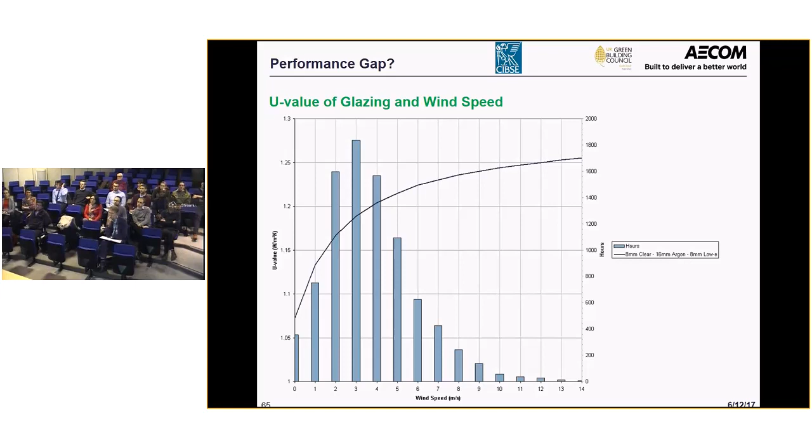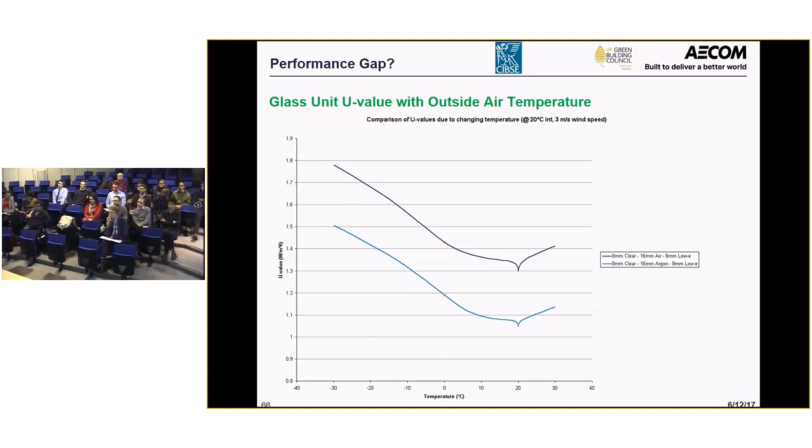All of the calculations are done with no temperature differential across it, so it's optimum performance. If you get hotter or you get colder, the performance drops off. So you might say it's got a U value based on ISO down there at 1.05, but in reality, if I'm using it in the Antarctic, it's probably 2. But in our normal range, we might go down to there. So when you want the performance, you haven't got it. And that's just another one variable, but you could use the 2 of them.

What happens with the cavity widths? And it depends on what gas is in it or whether it's air.

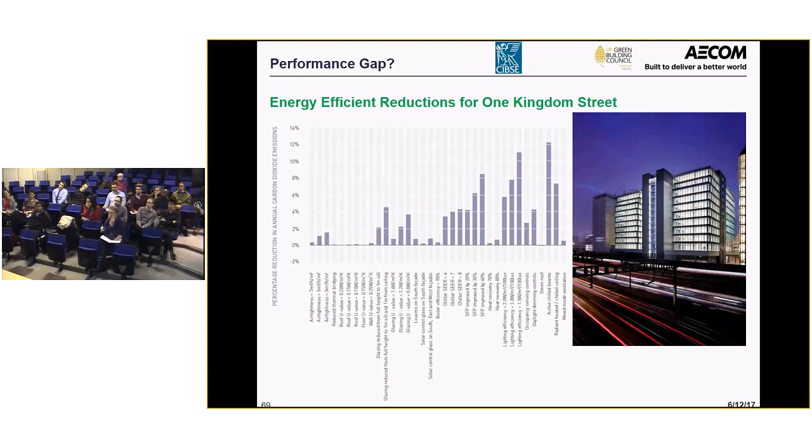Let's do another one. That one went down to 3, not 5, because it was overheating most of the time in that mixed-use one, and actually having it more airtight didn't give you the free cooling you were getting at other levels. The balance point is probably around 4.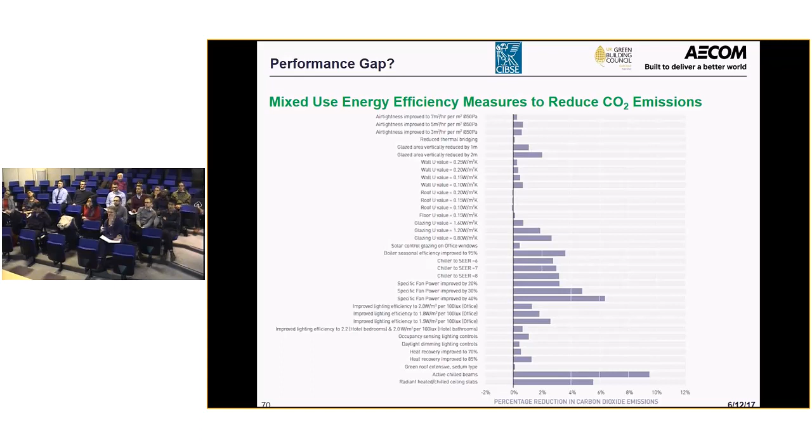So you could look at optimums, but when are you going to get that? You don't know what you're going to get. You just put in a number and it's done under an artificial test. Where should you put your glass? I really got to stop, haven't I?

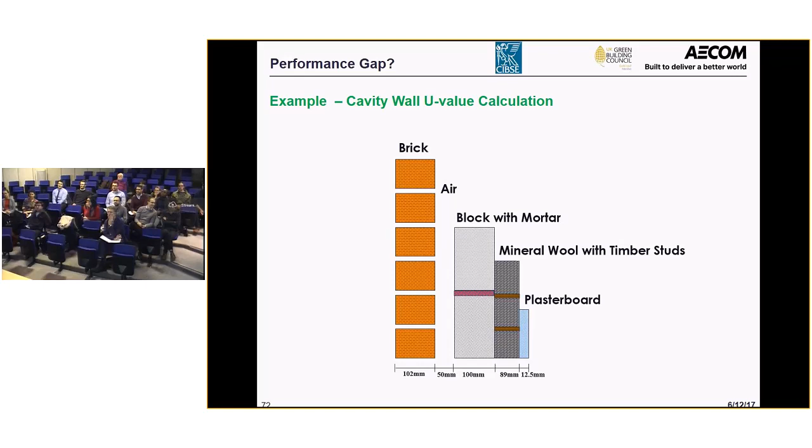So just a couple of things here. U values - people calculate U values, and most software does not do it properly. We've had 3 ways of doing it over time, and people do lovely charts saying back at this level of building regs we needed 0.6, then it went to 0.45, then to 0.35. What they don't get is it says clearly in the beginning of the document, we've changed the U values not just by the number, but by the way we calculate it.

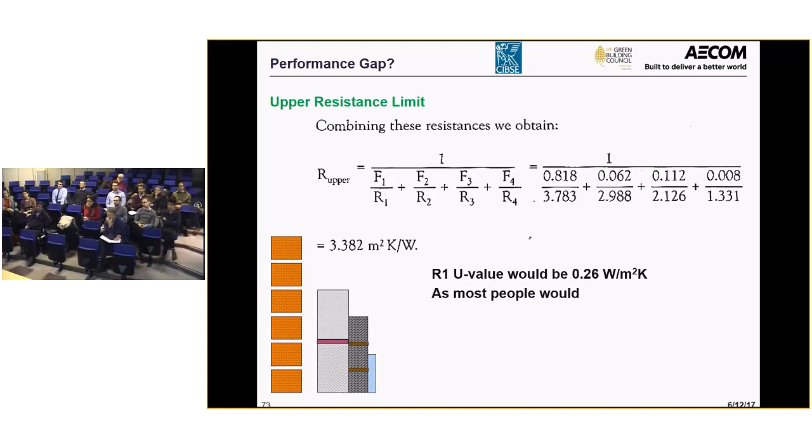Now, how much difference was the calculation method making going from old methods to new methods? So this is the latest way of doing it. We went from the way most people were taught at university - you put a line through it, and you work out what the resistance is of each one with the inside and outside, and you calculate, oh it's good, it's got a U value of 0.26.

Has it really? If you went to the 1995 method with the proportional area method, the U value calculated for exactly the same one was 0.3. If you do it under Part L 2002, it's 0.32. Now people say it passes easily, but if the pass mark is 0.3, it actually fails. But you've calculated it using that, so you say it passes. That's quite a big difference just because we've changed the way we calculate it. And again, most people are not aware of that.

Are the numbers behind those things any use to you? So what's a vapor resistivity? I only do condensation calcs, and you're relying upon data. CIBSE is brilliant for this - it gives you minimum values and it gives you a typical one to use. And then it says this about a typical value.

Typical values are taken from the middle of the range of values for each material and may be used for calculation in the absence of more specific data. However, it should be borne in mind that individual samples of materials may exceed these typical values by a factor of 2 or more. So we're doing all these calcs based on some number taken out of the CIBSE guide - it says use 0.5, but they're telling you it could be 1 or 2.

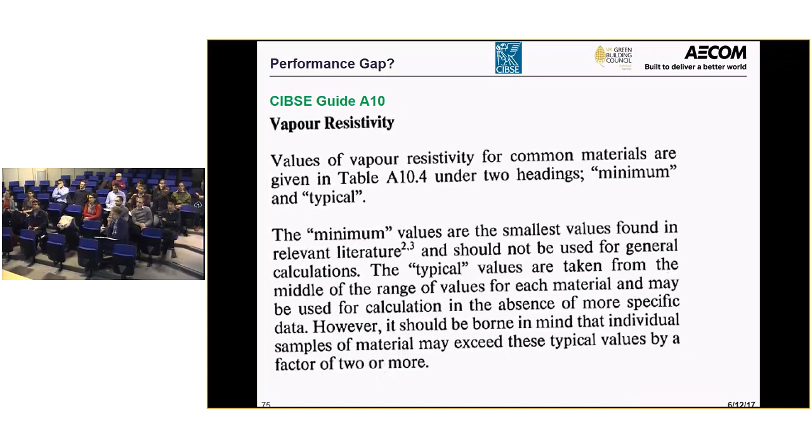So what do you do? Should you do it with the minimum and the max and say, oh under this one it fails and under that one it passes? That's not a lot of use to anyone, is it? So we take typical values that we know are not right, and then when we measure our buildings, we say, oh well we haven't got what you said we'd do. Well, you didn't even know what the materials were.

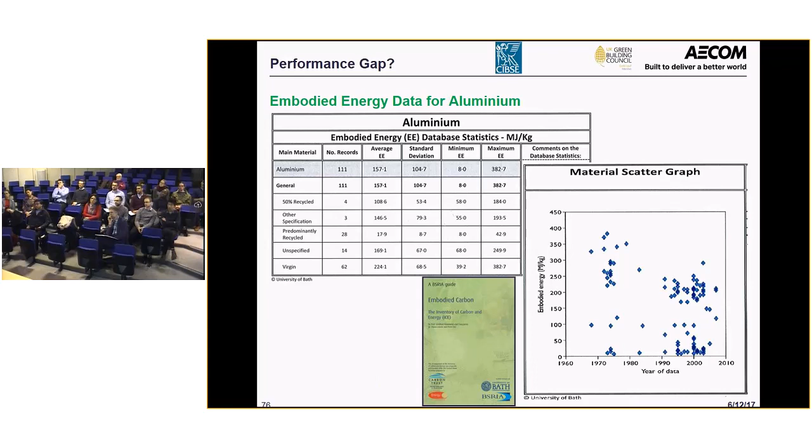So we take the typical ones, because CIBSE say to take the typical value. But we know that it won't work like that. And then it's even worse when you get on site and you say, well these are the calculated, but the actual measured with poor workmanship are 5 times worse.

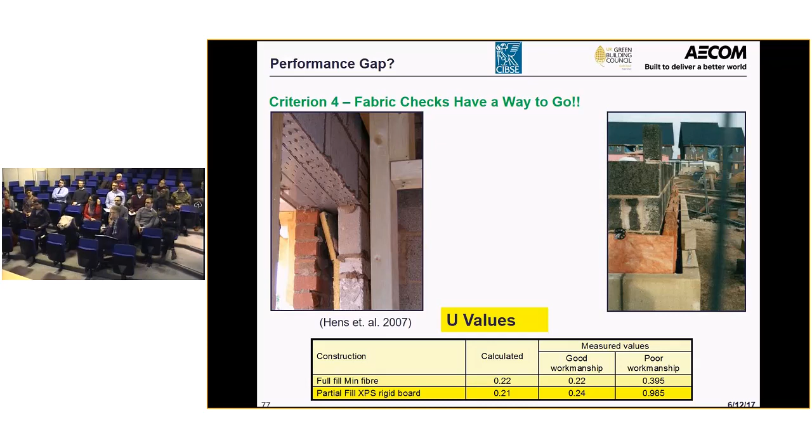And the other big con is floors. How many of you give a different floor U value for every single room you do? Every single room should have a different U value for the floor, depending on how close it is to the outside. And inside might even have a heat gain coming through it and not a loss.

But people say, if we did all the proper U values in the perimeter, it would fail the Part L test, because they got below this number. And at the edge, it could be 1 or 1.2. Then we put up a building, and it's cold in the perimeter. Why? Because we've used a U value that applies across the whole floor, and actually, that loss is all in the perimeter. It happens to be also where we've often got a cold downdraft and a cold surface, and we're feeling freezing cold, yet we've designed it right, because we've taken the mean temperature in the middle of the room, the mean U value, and then we expect the building to perform properly.

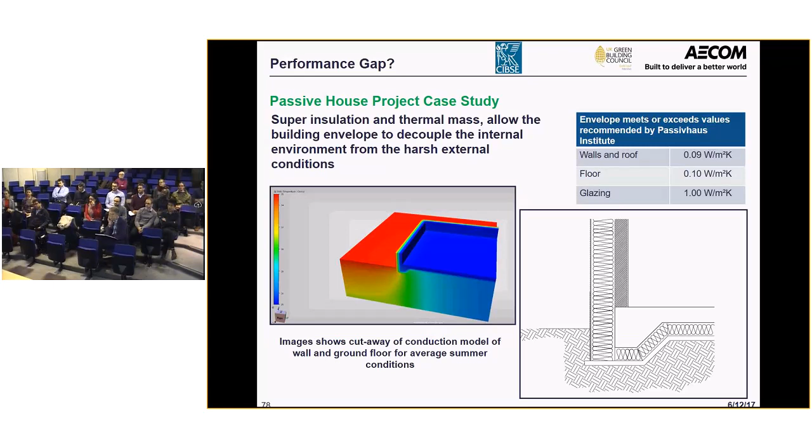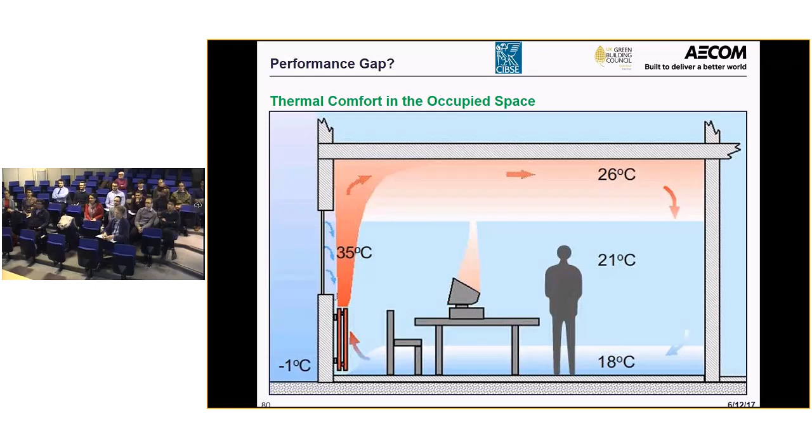So I shall stop with that, because essentially we say it's fully mixed, and here we quite clearly say it's 18 down there, it's 26 up there, so we've got heat gain and loss through different things, and we ignore them in our calcs. This is one we did.

I'll say a little bit of this because I was involved with doing it. I wanted to rename that as a better guess at internal gains. It's called evaluating operational energy performance of a building at the design stage. Well, it's not really, because it's saying if you know what it is, you can put it in. Well, you don't know what it is until it's designed. But it does help you, and it does get closer to it when you fine-tune it.

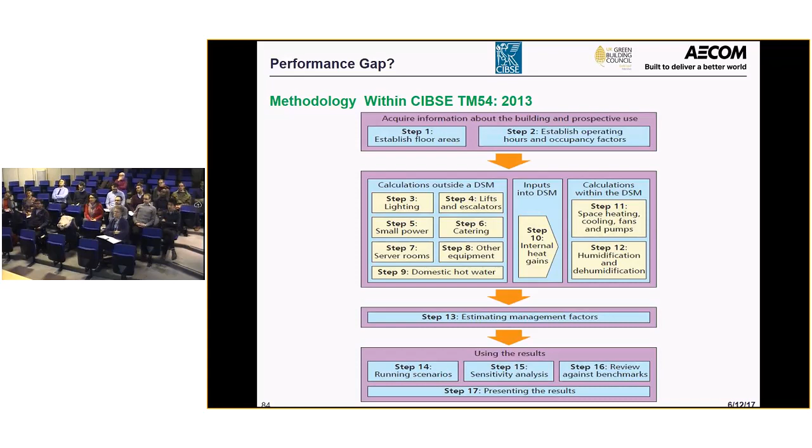And it tells you you've got to take into account things like catering. And catering's a massive thing. You need to take into account the lifts. You can easily have a lift in a lobby using 58 kilowatt hours to make it work. So you can have massive gains.

And what you're saying with this, which I like, is that each of them has a high, medium, and low. So for heating, it could be in that range, and this could be in that range, and it could be in this range. And all you're telling people is, no, we can't calculate it exactly, so we'll give you some boundaries, and it's anything between 20 and 200.

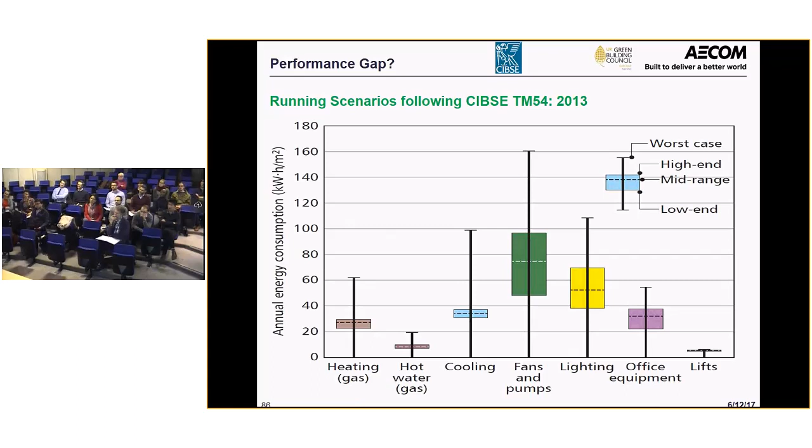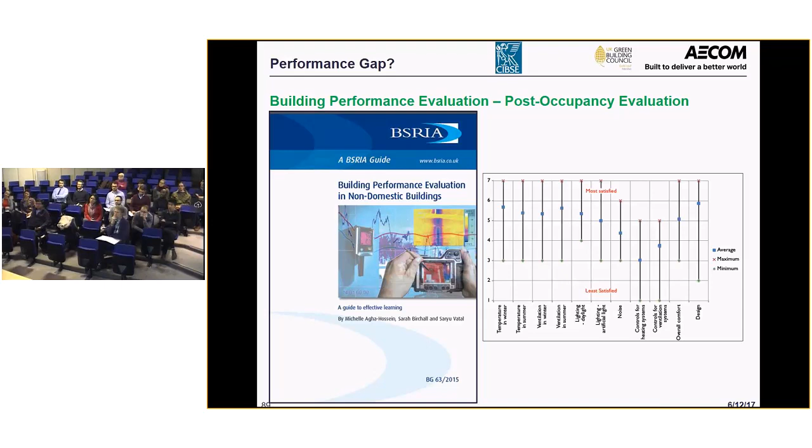And people don't like that, because they say, can you be a bit more accurate? Well, can we? I don't know. Yet we'd love to give them a number, and we've got to follow the standard ways of doing it, which stops you doing it in more detail, you might say. And then we've got to make sure it's giving results at the end. When you go back in and test them, you'll find all sorts of things that happen - the issue, the cause, and a solution for it.

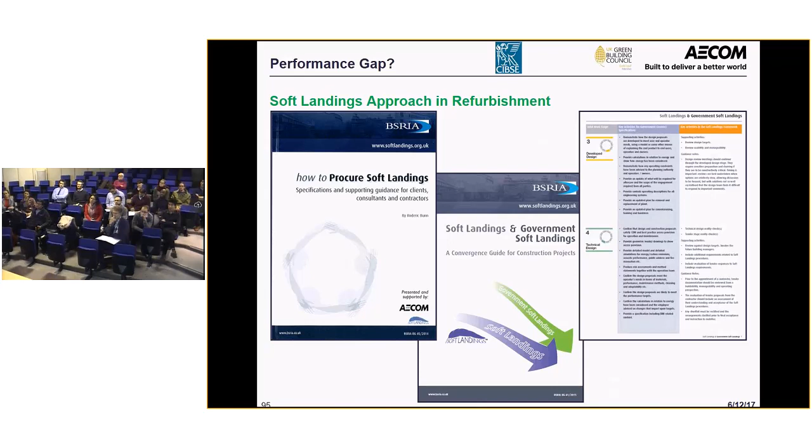It's good to see that the new BREEAM is going to tackle the performance gap, because it says we model it. Now, does modelling actually cut the performance gap? I've got my doubts. But if you want to get into this sort of stuff with digital engineering, we've got a new society for it. I've gone on too long, and sorry, I'll shut up.